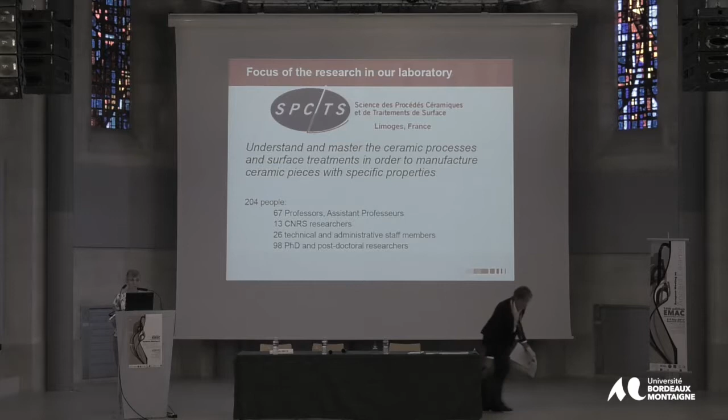Thank you. Good morning, ladies and gentlemen. First of all, I would like to thank the organizers for inviting me to talk to you about current trends in ceramics. Our research laboratory, called Ceramic Processes and Surface Treatment, is located in Limoges, in France.

Our research focuses on the understanding and mastery of ceramic processes and surface treatments in order to manufacture ceramic pieces with specific properties. We are about 200 people, including roughly 100 PhD and postdoctoral researchers.

Concerning activities on construction materials, it's part of what we call the Carnot Institute, called Materials and Equipment for Sustainable Construction. The idea of the Carnot network, which is a French network equivalent to the Fraunhofer in Germany, is to bring public research and industry together in order to respond to corporate needs for innovation and to dynamize their activities and support their competitiveness.

Before showing you some examples of ceramics, I have a little movie I would like to show you, made by our master students and some of our young colleagues, showing everyday applications of ceramics. Here we go.

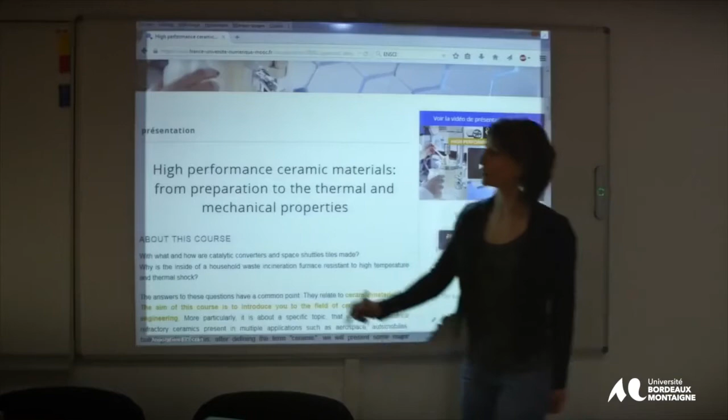So, as you can see, this was a little movie showing some applications of ceramics.

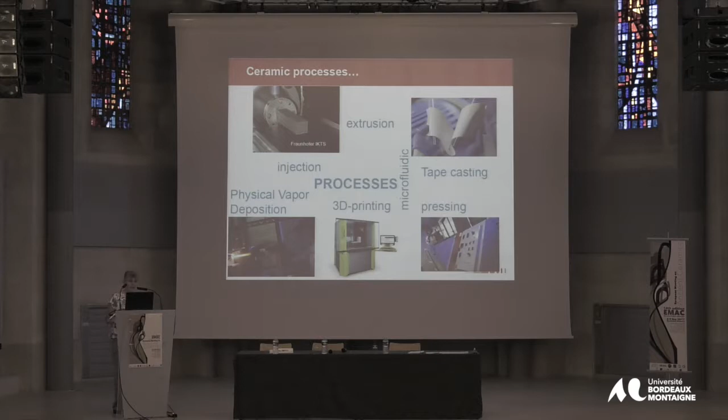At present, there are many ceramic processes to manufacture ceramics, like extrusion to make hollow pieces, tape casting to make supple ceramics, 3D printing, pressing, physical vapor deposition, and so on.

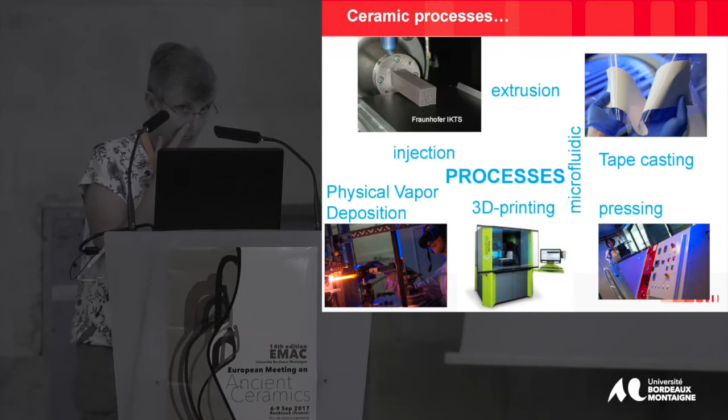You've seen through this little movie that many sectors are concerned by ceramics: health, with prosthesis and bioceramics; communication, electronic devices like the computer you saw, nonlinear optics, glass fiber for transmission of waves; transport, aircraft, car, satellites; tableware, porcelain—of course Limoges is known for its porcelain; the energy sector, like solar panels, nuclear fuels, refractories; building, cement, concrete, glass, plaster, tiles and brick; and environment.

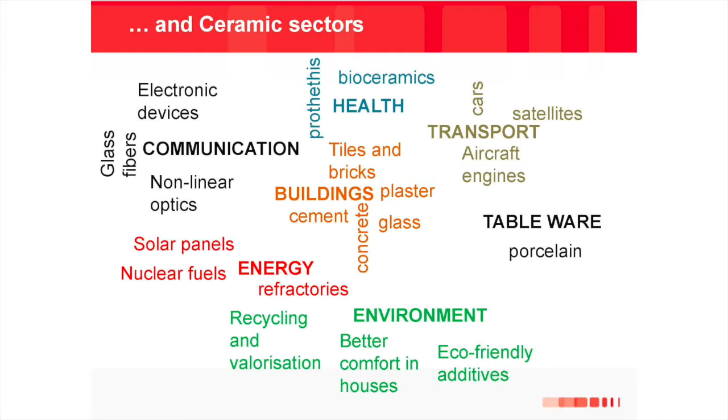Today I will focus my talk on the environment, and I will give three examples. The first is on recycling and valorization. The second is how to develop ceramics to have better comfort in houses. And the third example is on the use of eco-friendly additives in one of the ceramic processes I've shown, which is tape casting. So let's start with the first example, the recycling and valorization of dam sediment in the cement industry.

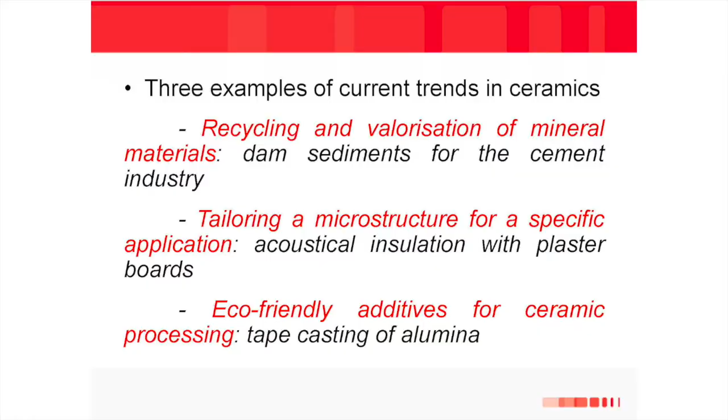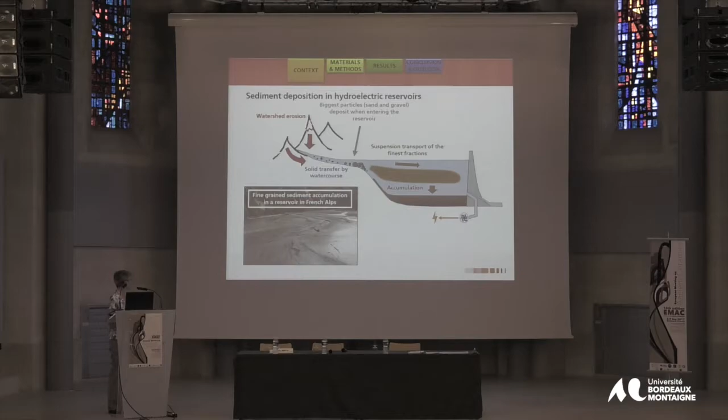Here is an electric and hydroelectric reservoir. Usually it's close to a mountain, so there is sediment deposition due to watershed erosion. There is solid transfer by the watercourse, and the biggest particles, sand and gravel, deposit at the entrance of the reservoir. The finest particles stay in suspension, and eventually accumulate at the bottom of the reservoir, giving this huge muddy accumulation shown here in a reservoir in the French Alps.

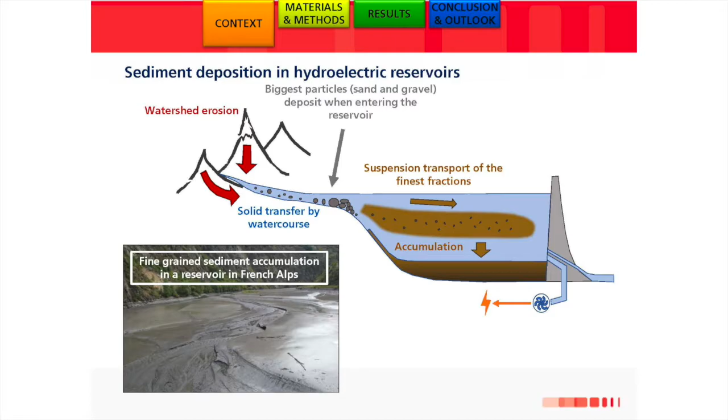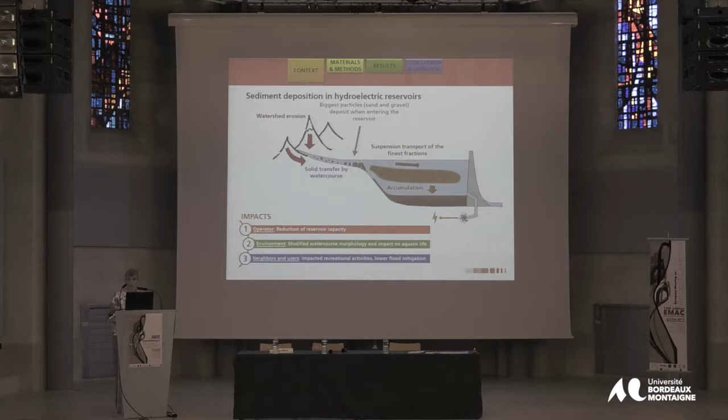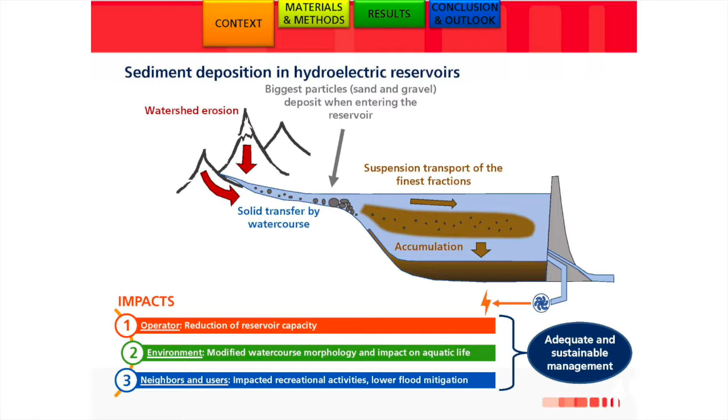These accumulations have several impacts. First, they reduce the reservoir capacities. Second is the environmental consequence, because it modifies the watercourse morphology and impacts aquatic life. It also impacts recreational activities. So therefore, there is a need for adequate and sustainable management of these sediments.

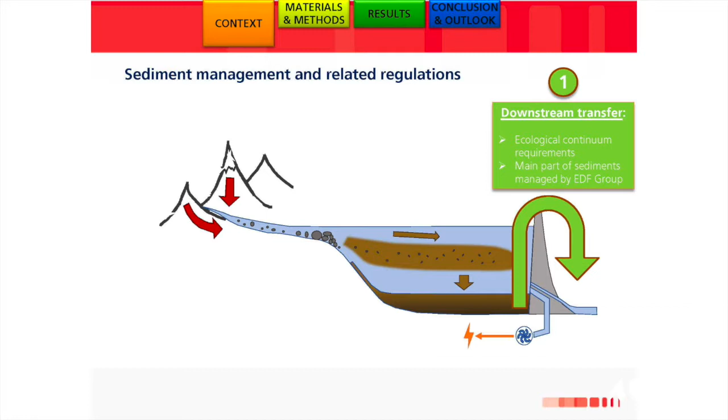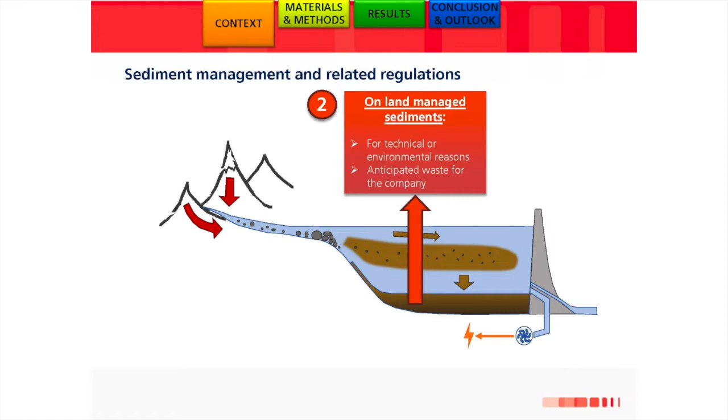The first thing done by EDF, the French electricity operator, is to remove these sediments and store them on land. But because the regulation will evolve very shortly, the landfill option is not the long-term solution, so we have to find beneficial reuse of these sediments, but obviously this needs some work.

So in the laboratory, we've looked at several routes to valorize these sediments: to manufacture ceramic products, to use them as cement, to manufacture cement, concrete, a layer in road construction, or agronomic uses. Today I will talk only about the uses to make cement, because it can absorb the highest volume of these sediments, with two possibilities.

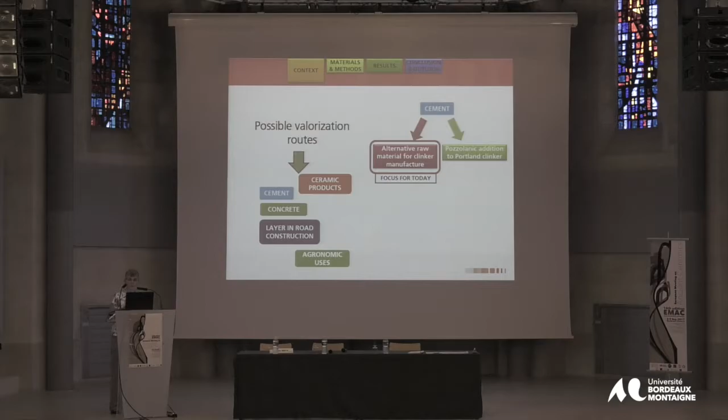The first is to use these sediments as an alternative raw material for clinker manufacture. The other possibility is to use these sediments as a pozzolanic addition to Portland clinker. This work is a project we've done with EDF, Technical Lab, and the Association of the Cement Industry.

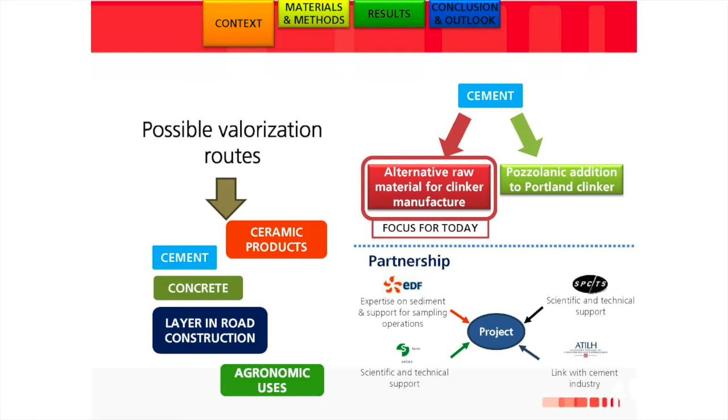Just a quick background on how we manufacture clinker. It's a mixture of limestone, a source of calcium oxide, noted C in the cementitious industry, plus clay, which supplies silica, alumina, and iron oxide, notation S, A, and F. After crushing these raw materials and homogenization, there is a sintering stage at a high temperature, 1450, and we obtain four mineral phases: calcium silicate, alite here, C3S, belite, calcium aluminate, and calcium aluminoferrites.

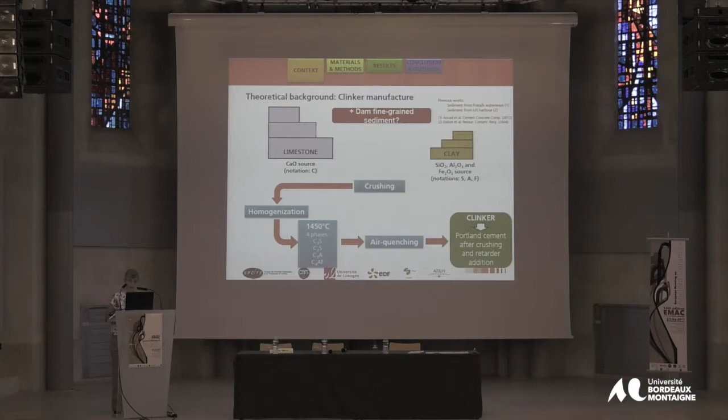These are air quenched, and then the clinker is crushed to obtain the cement, which is mixed with different additives to have the proper setting characteristics. So the idea is, would it be possible to replace part of the clay or the limestone by these sediments? Because, as you can imagine, these sediments are rich in all the oxides which we find in the clinker.

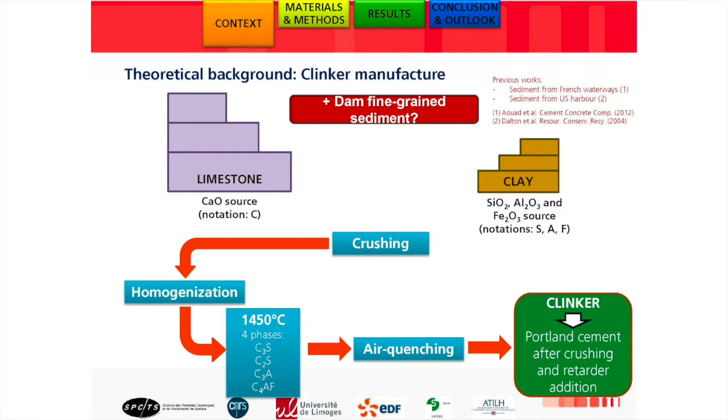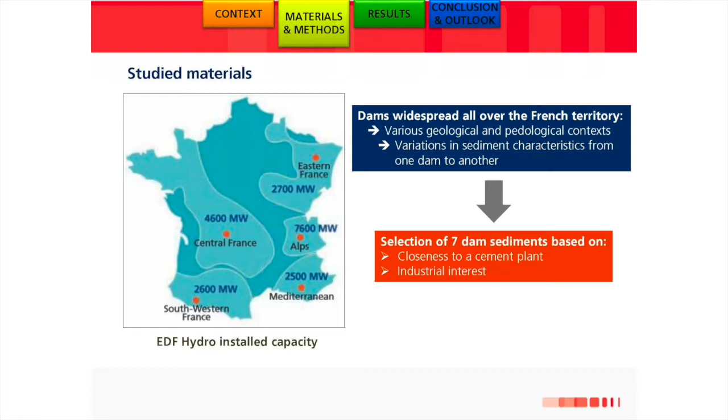So what we decided to do is select 7 dams on the basis that they were close to a cement plant, and because of this proximity, they could be of potential interest for valorization in the cement plant.

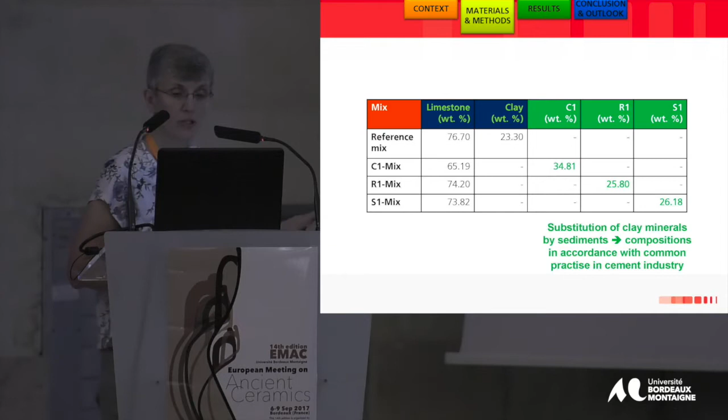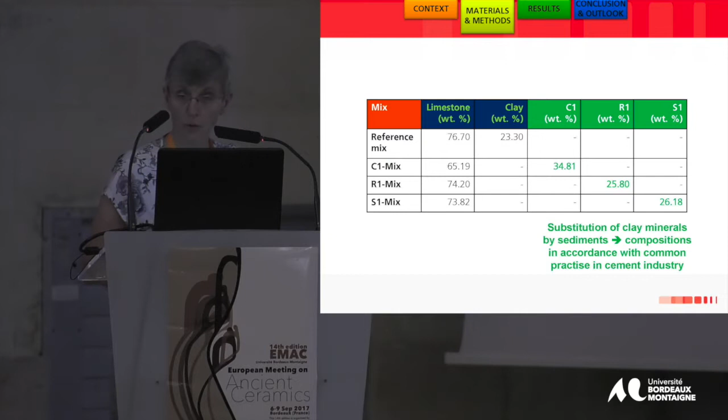Here is an example of 3 sediments, C1, R1, S1. Our reference mix has 76% limestone and 23% clay, and the idea is to substitute part of the clay, or completely the clay, plus part of the limestone, by the sediment - so you see 34, 25.8 and 26%. The idea is to get a composition in accordance with common practice in the cement industry.

So what did we do? We first started with characterization of the raw material, the sediments and the quarried rocks, using techniques like particle size distribution, which has to be below 100 microns in our case, density, specific surface area measurements, chemical composition through X-ray fluorescence, determination of crystalline phases by XRD, or a specific study of the clay fraction.

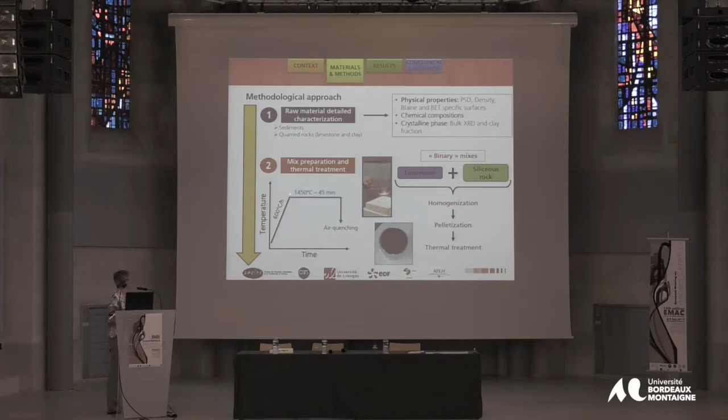These are then homogenized, pelletized into small beads, and heat treated as shown here: a ramp of 600 Celsius per hour, 1450 dwell temperature, and 45 minutes. In fact, these conditions are very close to what is done in a cement plant, and then air quenching. After air quenching, we obtain these beads here, which are crushed to give the cement.

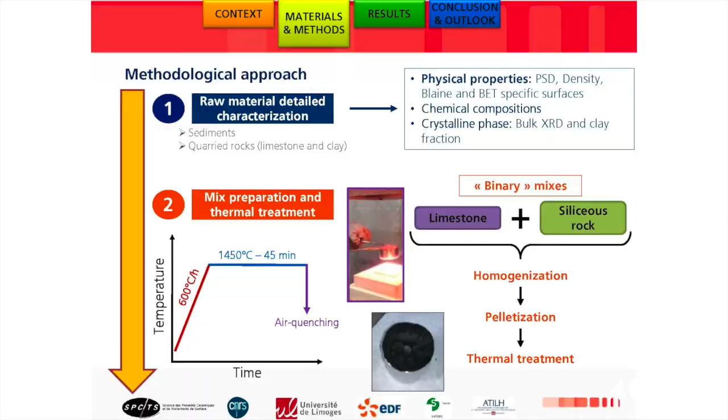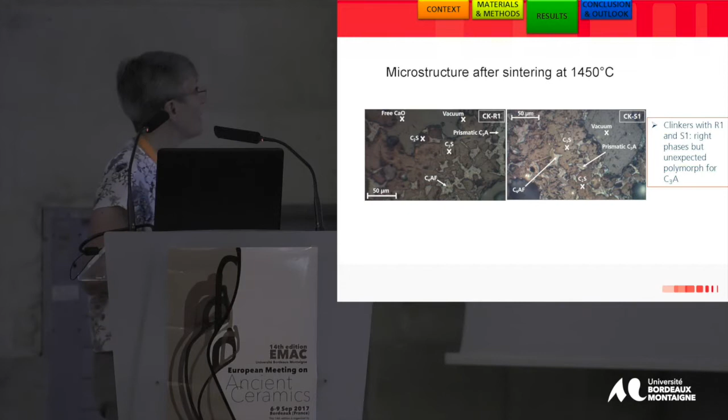On this micrograph, we wanted to check if the microstructure after sintering was similar to what is found in Portland cements. And indeed, with R1 and S1 sediments we find the phases typical of cement: the calcium silicates, calcium aluminate. Maybe there are some unexpected polymorphs because of additives, some minor elements which can change the polymorphs of the calcium aluminate phases.

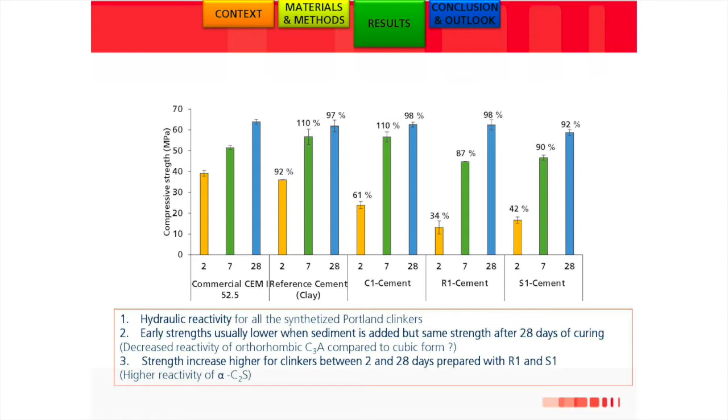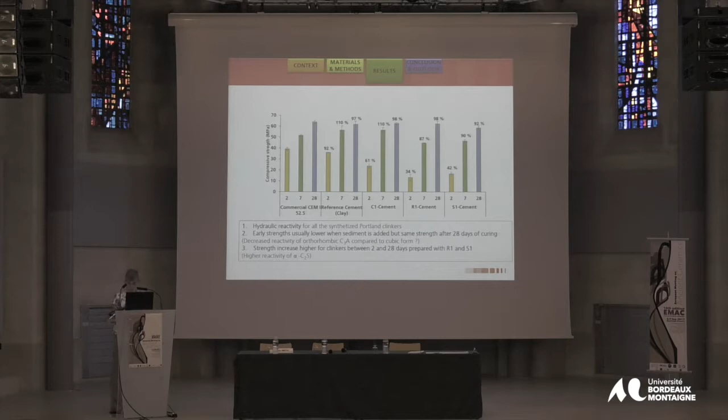Here are the data we obtain with these sediments. Obviously, after 2 days of setting, the compressive strength is not as good as the commercial cement because of minor phases which develop during sintering. However, if we look in the long term, we obtain characteristics quite close to the commercial product. This means that by substituting 25 or 30% of the usual raw material with sediments, we obtain a cement with characteristics very close to a commercial product.

So what we conclude from these examples is that we obtain the phases found in Portland clinker. We have to pay careful attention to the raw materials because some minor elements can change the polymorphs.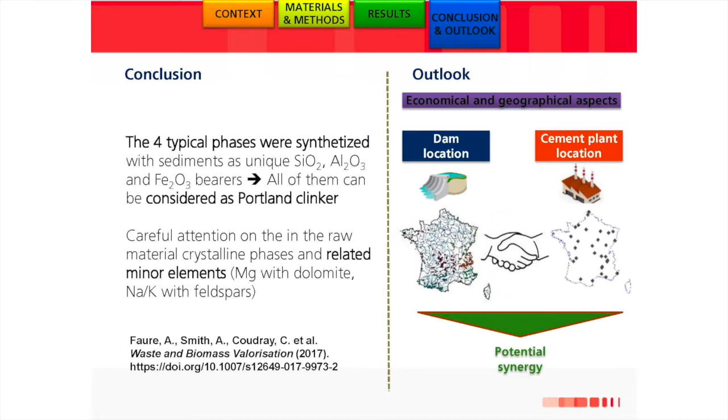In terms of economical and geographical impact, if the dam location is very close to a cement plant location, there is a potential synergy to exploit these sediments in the industry.

Second example we've done also in our lab is to tailor a microstructure for a specific application. In this case it's acoustical insulation.

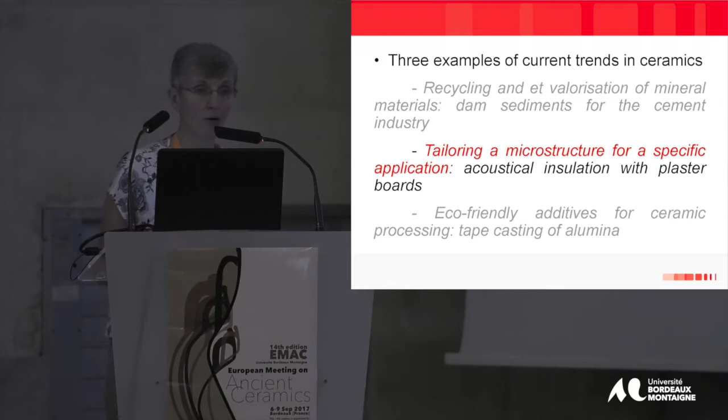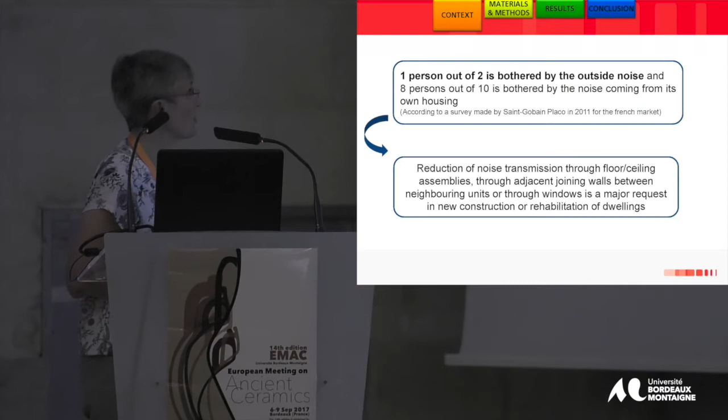According to a survey made by Saint-Gobain about 6 years ago for the French market, 1 person out of 2 is bothered by outside noise, and 8 out of 10 are bothered by the noise coming from their own housing. So reduction of noise transmission through floor, ceiling assemblies, adjacent joining walls between neighboring units, or through windows is a major request in new construction or rehabilitation of dwellings.

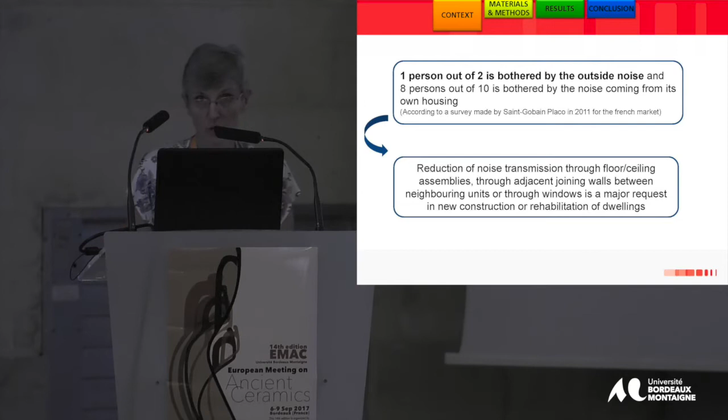So gypsum boards are already used alone or in a multi-layer configuration. I guess here all these panels are in gypsum. But they're also used increasingly as facing materials for interior walls.

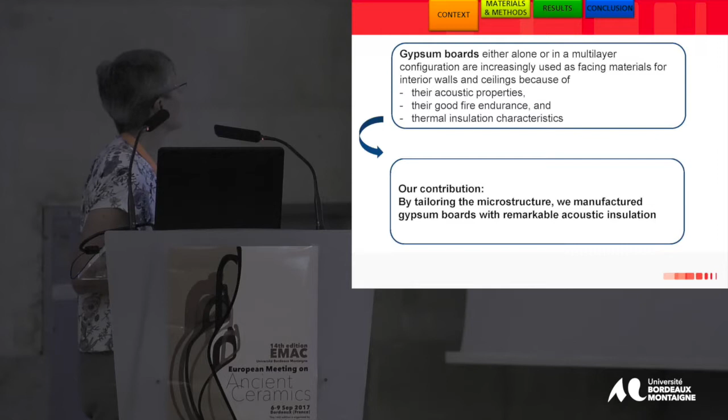This is because, first of all, of their acoustic properties. Second characteristic is their good fire endurance, which in terms of regulation is quite important. And also for their thermal insulation characteristics.

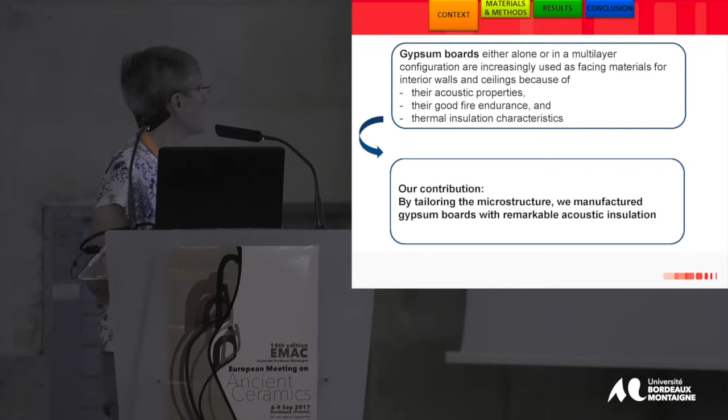But what was less well known is the relation between the gypsum microstructure and the acoustical insulation. So our contribution in this work was showing that by tailoring the microstructure, we managed to manufacture gypsum boards with remarkable acoustical insulation.

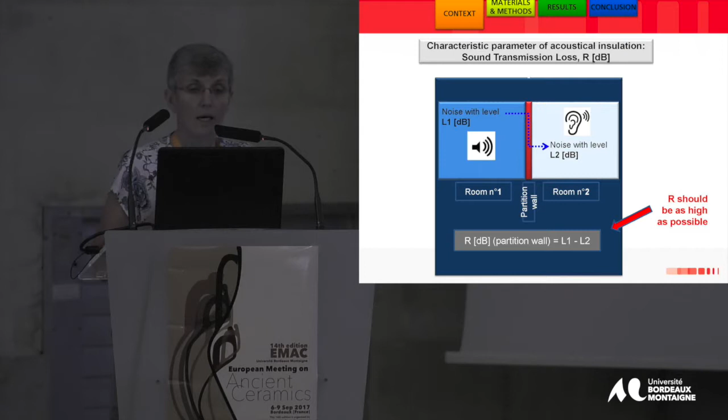Just to give you two important parameters in acoustical insulation: the first is what we call the sound transmission loss. Basically, when there is a noise level L1 in one room, when it goes across a partition wall, it drops down to L2, and what is required is to have R as high as possible so a person living in this room hears little.

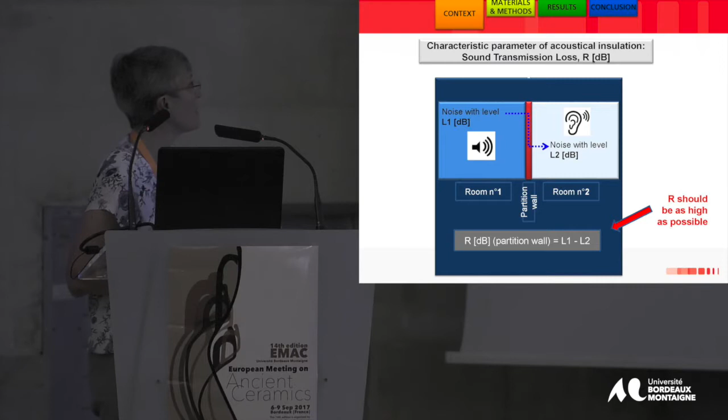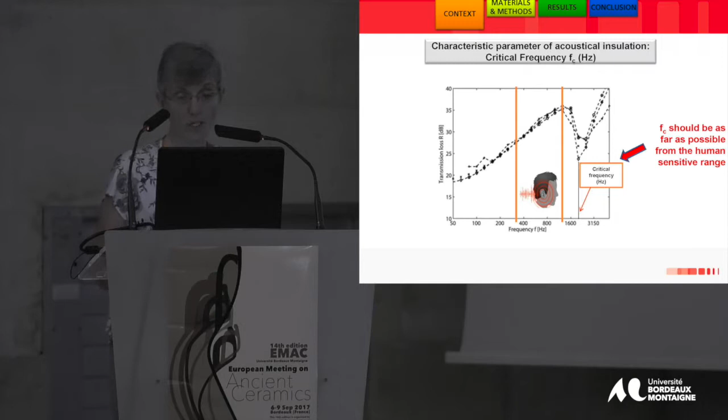Second important parameter is what we call the critical frequency. On this graph you have the transmission loss as a function of frequency, so it increases with frequency. But there is a specific frequency which is quite detrimental because there is a sudden drop of the sound transmission loss due to resonance phenomena.

And of course what we are looking for is to have this critical frequency as far as possible from the human sensitive range, which is between 300 and 1500 hertz.

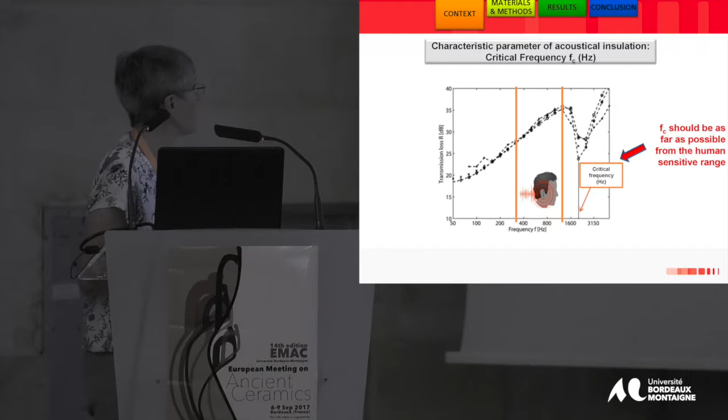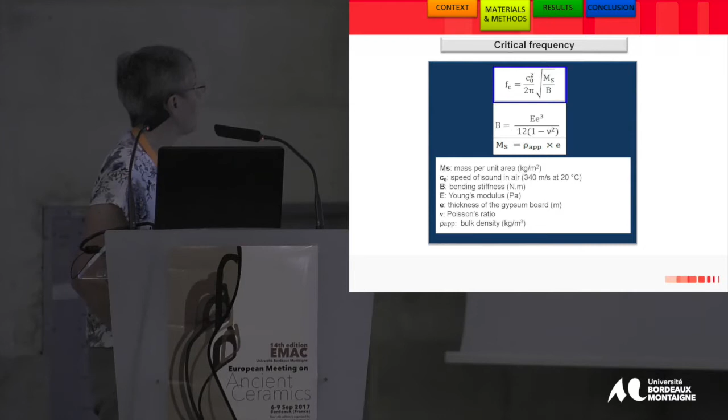So how can we do this? If we look at the critical frequency, there are some material parameters involved: the mass per unit area, the bending stiffness, Young's modulus, the bulk density, and Poisson ratio. The critical frequency is roughly inversely proportional to Young's modulus.

For the transmission coefficient, we have a relation which is slightly more complicated, but again we have material parameters: specific mass per unit surface, and Young's modulus.

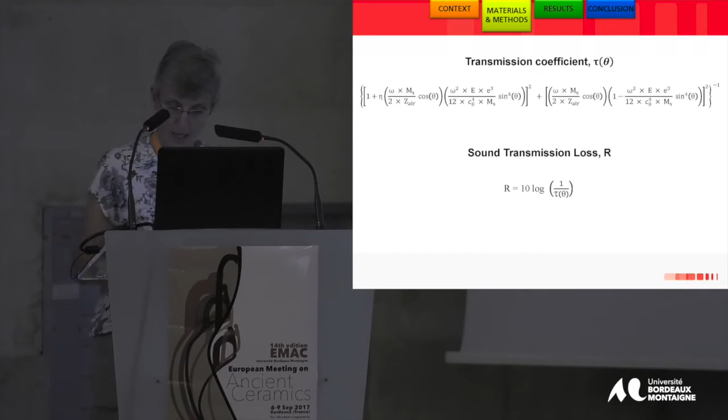So what were the possible experimental strategies we explored to modify both R and the critical frequency? The first one was to change the plaster over water ratio, in other words to dilute the plaster more, meaning that Young's modulus should decrease, the porosity should increase, but the critical frequency should also increase.

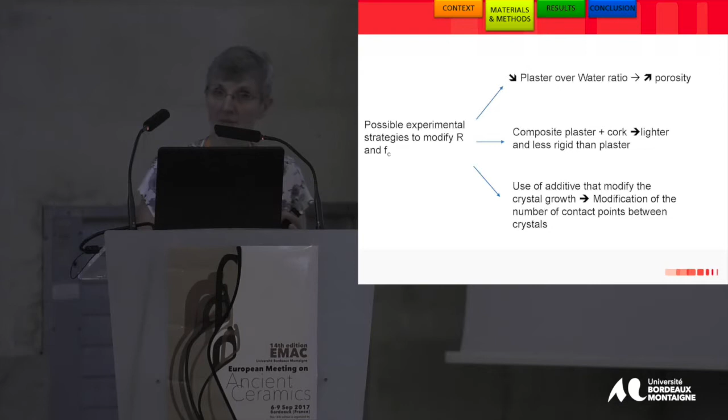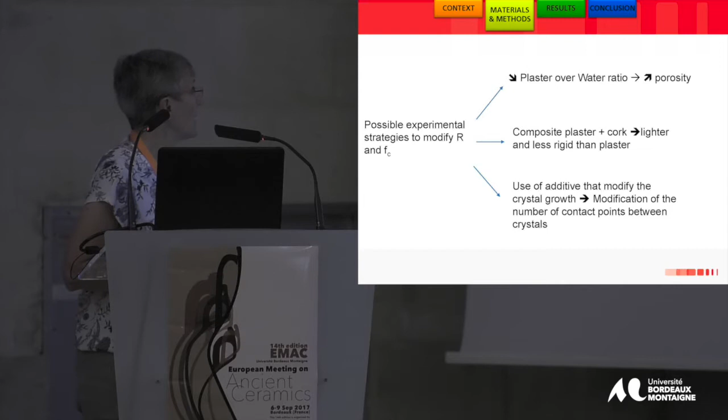Second strategy is to make a composite between plaster and cork, something lighter, less rigid than plaster, so Young's modulus decreases. Third strategy is to use an additive to modify the crystal growth, and by this we managed to modify the number of contact points between crystals.

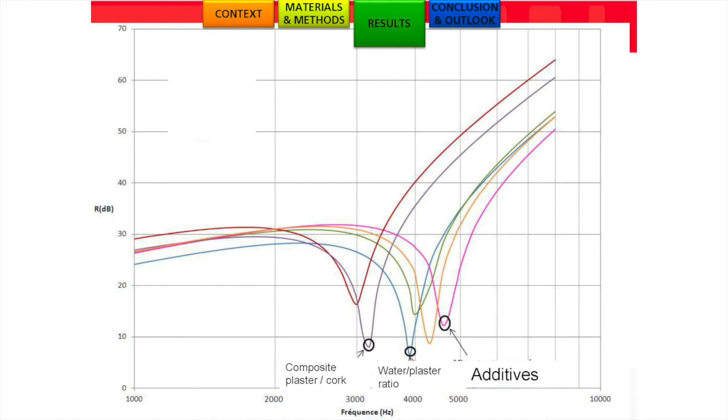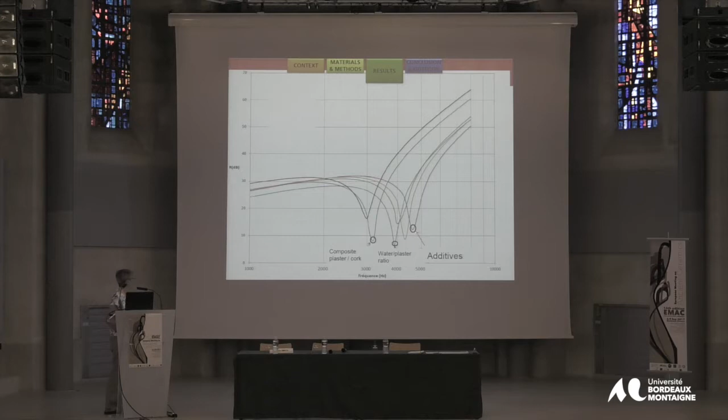The best result we obtained was with the addition of an additive, because the flexural strength was maintained, and we managed to shift the critical frequency to about 4500 hertz. How do we explain that?

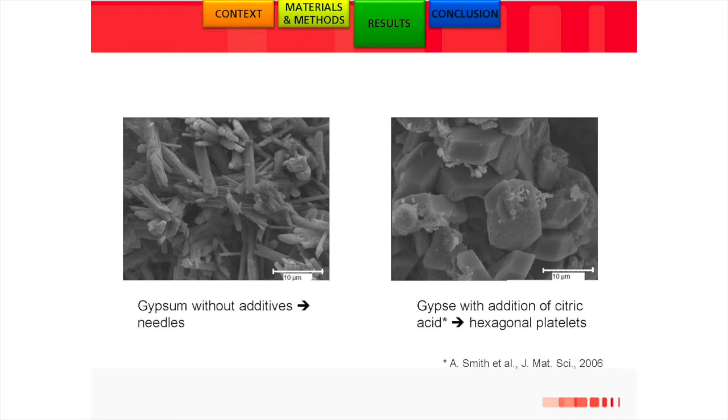If we look at the microstructure of gypsum without additive, we have a needle-like structure. When we add citric acid in very small quantity, we obtain platelets.

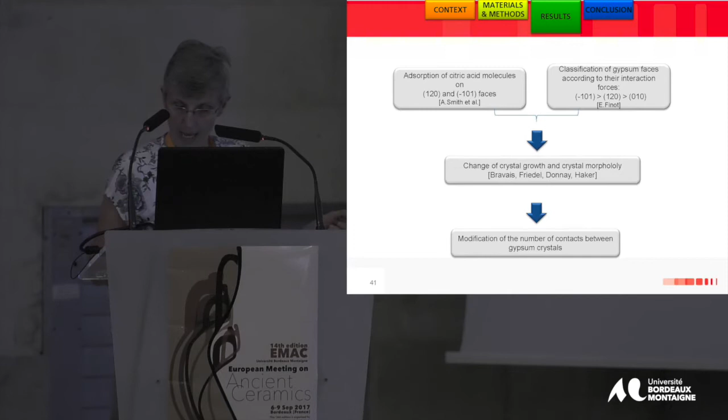And why do we have this morphology? Because we showed that the molecules of citric acid adsorb on specific gypsum faces, 1,2,0 and minus 1,0,1, which were found to be the most reactive faces.

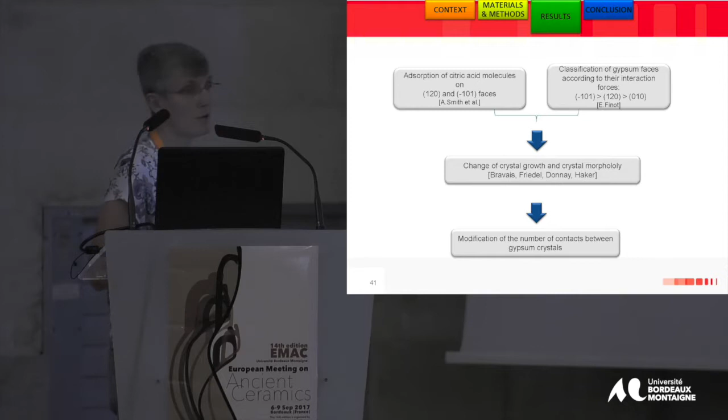Because of this adsorption, it modified the crystal growth, as shown by the Bravais, Friedel, Donnay-Haker theory. Modifying the crystal growth, there is a modification of the morphology, and therefore we modified the number of contacts between the gypsum crystals.

So we did a small calculation to try to calculate the number of contacts in this configuration where we have needles and when we have parallelepipeds. Obviously, the number of contacts per unit length for gypsum with the additive is about 5 times lower than in the case of gypsum without any additive.

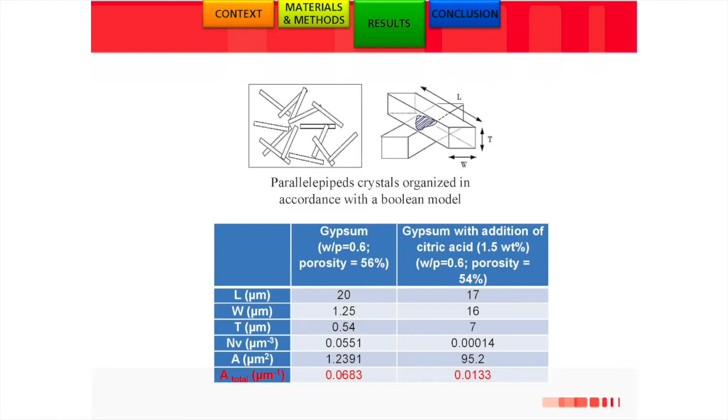So because of that, we decrease Young's modulus, but we increase the critical frequency.

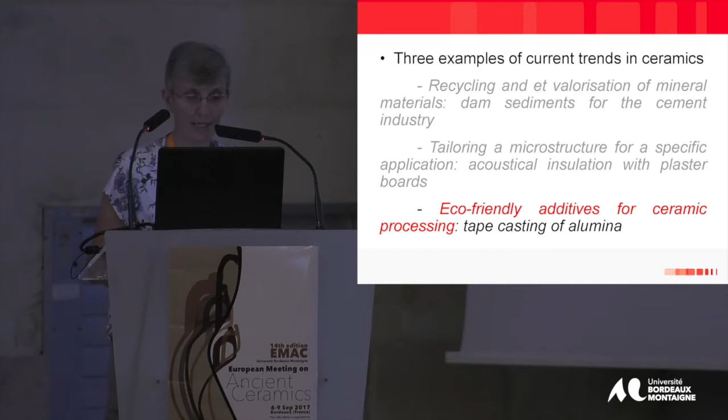Last example is the use of eco-friendly additive for ceramic processing, and I give you the example of the tape casting of alumina. So what is tape casting? Basically, we mix a ceramic powder with additives, so we have a binder, plasticizer, dispersant, to obtain a ceramic suspension, which is cast onto a substrate.

And after a good drying, the ceramic tape should be very supple, but without any cracks, without any defaults. Then removal, debinding of the additive, and sintering, we obtain a ceramic which can be used for applications such as microelectronics or membranes for gas separation.

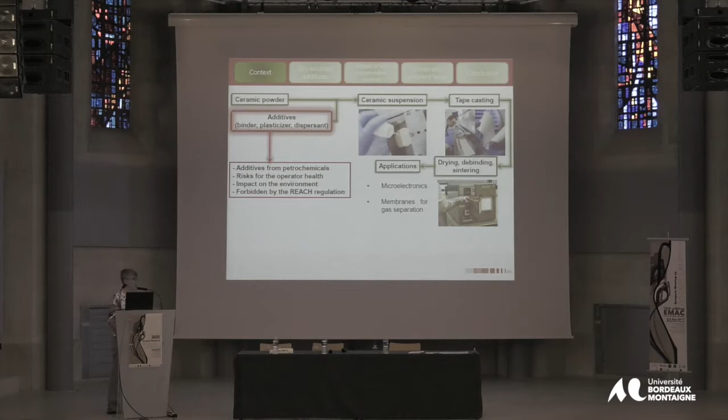But because at the present time these additives come from the petrochemical industry, they can present risk for the operator health, especially if they are manipulated in large quantities, can have a potential impact on the environment, and may be shortly forbidden by the REACH regulation. We have been looking at alternatives to replace these additives by molecules which respect the green chemistry principle.

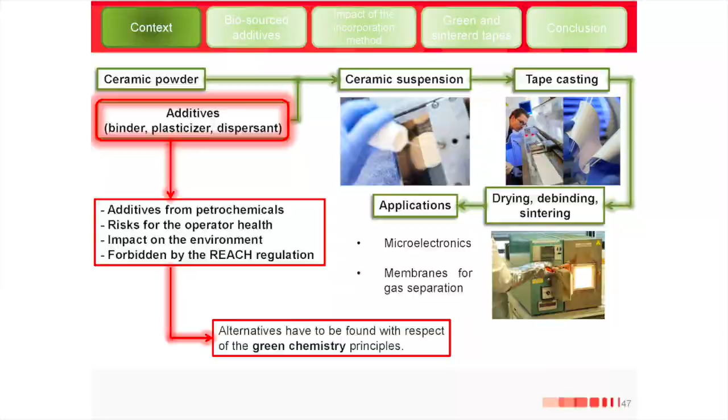So I will show you what we've done with the dispersant and the binder. Let's start with the dispersant. So the way to check if a dispersant is efficient or not is to measure what we call the zeta potential, which is the surface charge of the particle as a function of the pH.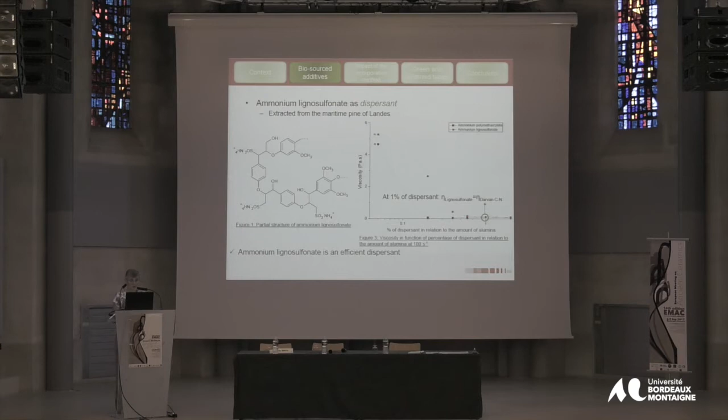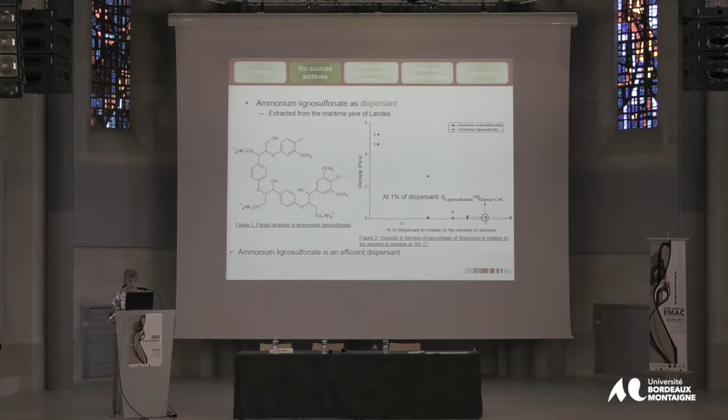Another parameter which we measure when we want to check that an additive is efficient as a dispersant is to measure the viscosity as a function of the amount of dispersant. And for tape casting, what we want is to have the viscosity as low as possible. Again, if we put 1%, which is a minute quantity of this additive in the suspension, we obtain a viscosity which is very similar to what we obtain with the Darvan. So ammonium lignosulfonate, for us, it's a good dispersant for alumina.

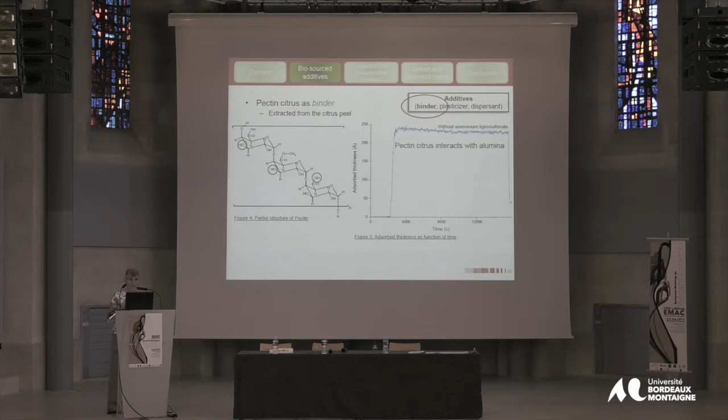Second additive is the binder, so we used citrus peel binder, okay? And how do we measure that a binder is adsorbed or not on a ceramic powder? We measured the thickness of the adsorbed layer by microbalance, and we have seen that the thickness of the adsorbed pectin layer is about 230 angstroms, so 23 nanometers.

So it means we have a nice shell of binder around the alumina powder. Therefore, we have a very good distribution of the particle in the medium.

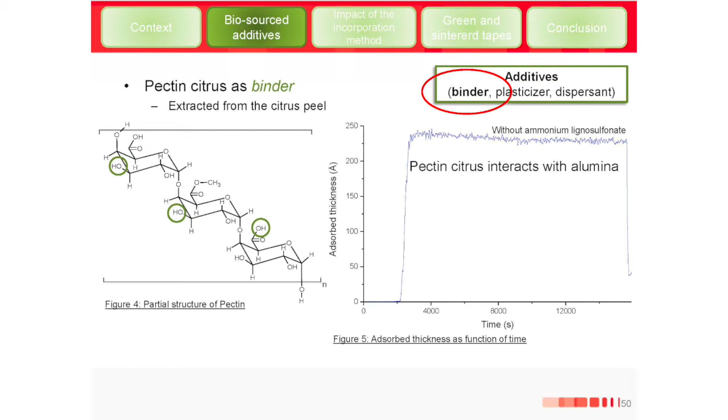Now we found a good binder, a good dispersant. We are going to prepare a suspension. First of all, we start with the pectin, so pectin, you obtain a gel, okay? And we've tried 3 different protocols to check whether there was an incidence of the order of introduction of the additive on the rheology.

We started with alumina powder, and the dispersant added in one go in the pectin gel. Second protocol was to add alumina alone in the gel, and then the dispersant. The third protocol was to first mix the alumina with the dispersant and then to add it in the pectin gel.

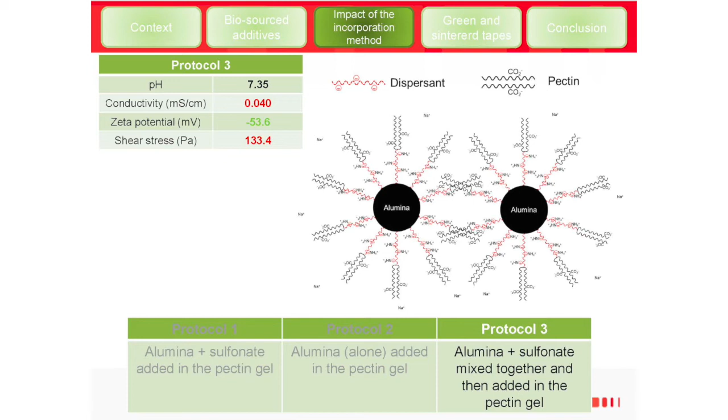After sintering at 1600, we have a density around 93%. As you can imagine, for this specific application, we try to have a density as high as possible.

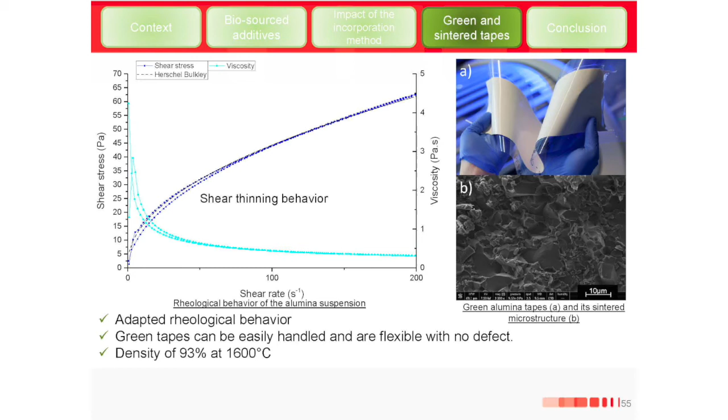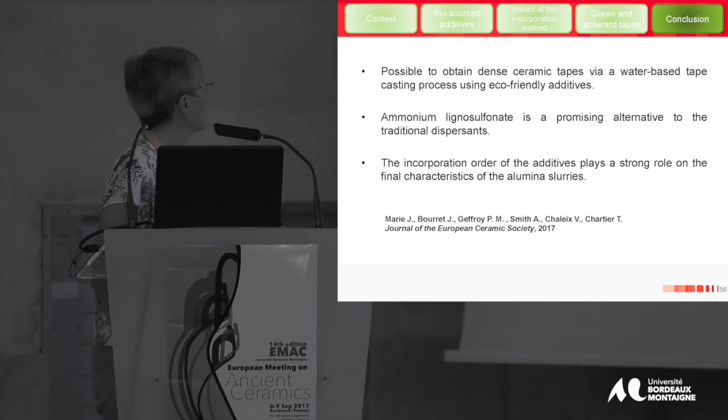So through this example, it was possible to obtain dense ceramic tapes with a water-based tape casting process by using eco-friendly additives. Ammonium lignosulfonate is a good alternative to traditional dispersants, and of course the order of introduction plays a strong role on the final characteristics of the alumina slurries.

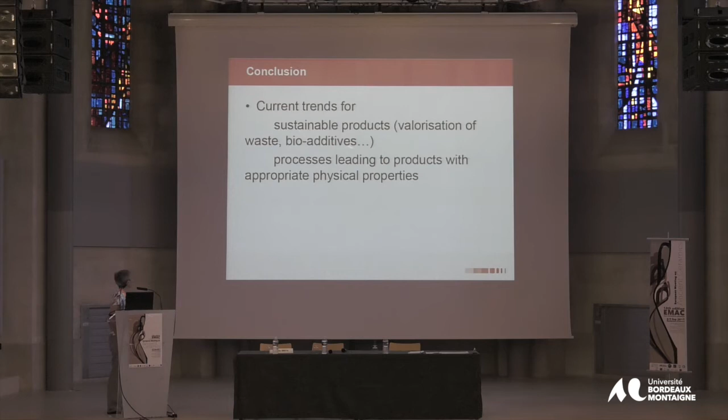Conclusion. Through this example, I couldn't give you all the examples for all the ceramics, but just a little focus on the environmental aspect. In ceramics, at the minute there is a current trend towards the valorization of waste, the use of bioadditives, and also processes which lead to products with appropriate physical properties.

But if we look for the industrial application of all this research, there is a need for a sound life cycle analysis. In other words, to say where to put the effort. Do we have to put the effort on recycling, or on the process itself? That's still an open question, and it depends on the ceramic sector.

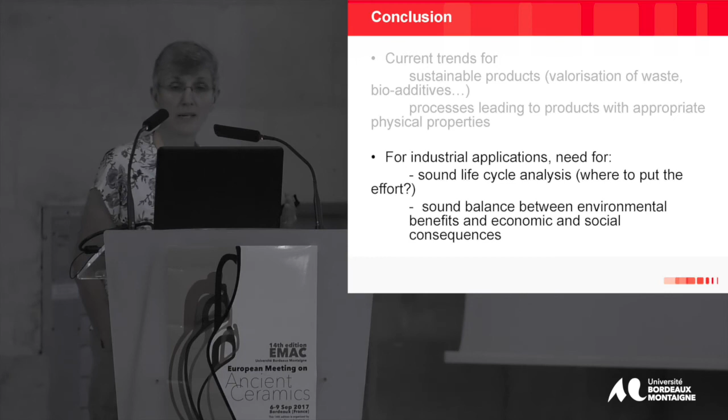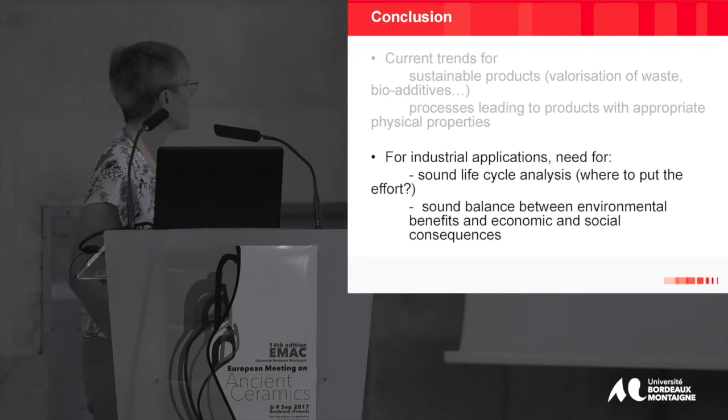Also, all of this is very good, but we need to have a very sound balance between the environmental benefits we can achieve and the economic and social consequences.

Last slide to say, you're going to tell me what is the link between ancient and current ceramics. Well, I would say that the processes used in technical ceramics started with the use of processes applied to clay minerals. So there is some continuity between the ancient processes and the current processes. Obviously now we have other processes, but...

Again, it's a paste, a rheology, mixing, additives, and so on. What we have in common is we use, I guess, the same tools for looking at the physics and the chemistry of these materials.

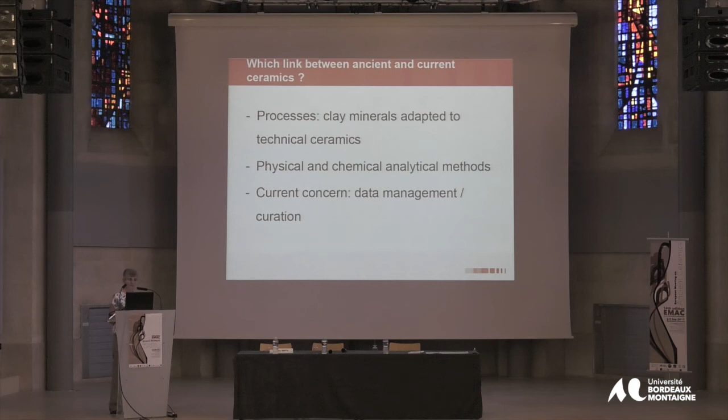And I think this is a concern, at least for the cement industry, but I guess it's probably a wider concern, because there is a lot of published data, many technical books and so on. So we need to have good data management or curation of the data.

What do I mean by that? There are many data which are available—again, I'm talking about the cement or concrete field. You have numerical data, categorical data depending on the application, Boolean data meaning the data are true or false, and structured data.

But this data must come associated with information. In other words, where and when were they generated—10 years, 20, 50 years ago? What was the source of the data? Was it a lab? Was it an industry or technical center? What were the kinds of tests or protocols used to generate the data? I guess these are probably also questions you have in your field.

So a sort of cleaning or data curation must include a computing approach or a big data approach to search and retrieve the data. And also, since we have many images, graphics, and so on, these need to be entered into a registry system to retrieve them when needed, and also to interface with current scientific work.